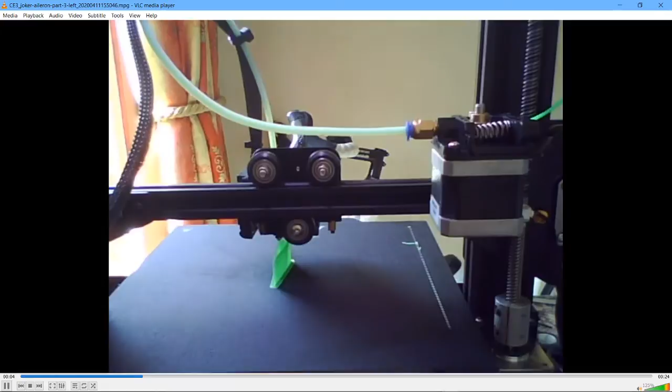Right, so yep, that came out good. Let's have a look at it. And then we're going to print out two bits together in the next run, and I'm going to show you per model settings. Again, this came out pretty good. Skin was good.

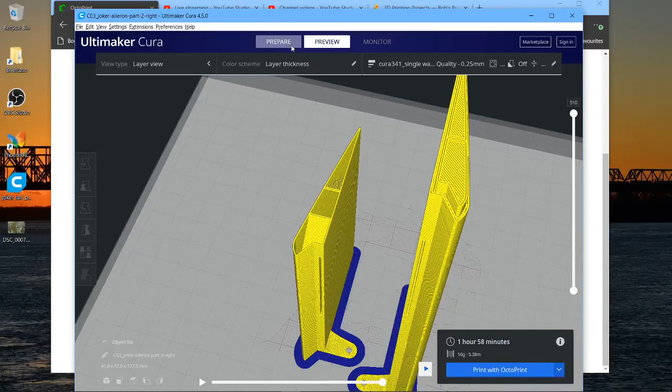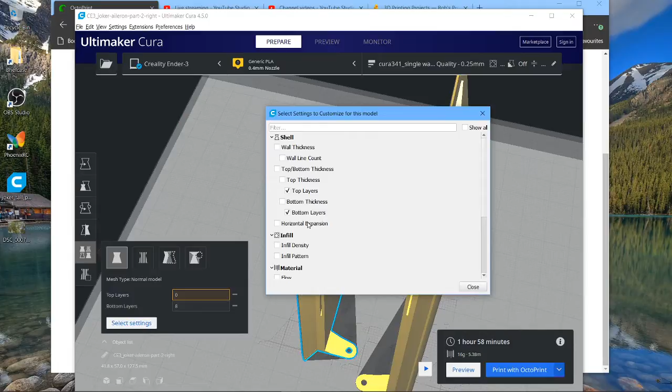Alright, so cross to Cura. So there's a feature I kind of touched on, but I didn't actually go into, where you can actually select the per model settings. And what you can do is per model that you select settings, choose what you want, bottom, top layers, and say close. So for the top layers, I've got 0 on this one. The bottom layers, I've got 8. And on this one, I've got top layers of 2 and bottom layers of 8.

So both of these have different settings, which is something Simplify 3D does. I believe what Simplify 3D does in addition to this is allow you to select different thickness at different layers. So you could say I want this bit beefing up, but I've not really needed that. But it could be useful if you had a lot of different models and you might want to choose something within the layer.

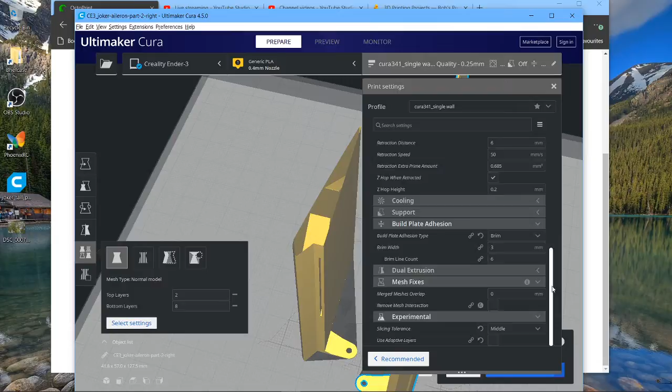And later on, I mentioned we'll have a look at adaptive layers, which is this setting down the bottom, which can be quite useful. And I have found on one of the wing sections of the Joker that you definitely need that. You need a combination of that and top layers.

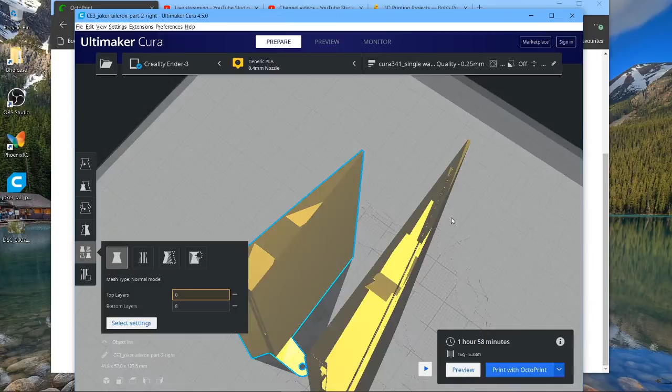So, well, I do actually want a top layer on this one, as it turns out, or I think I do. Let me just double check actually. Yeah, I think we might. No, we don't, because it is going to receive a dovetail, that one. Yeah, I'm just double checking that doesn't need a top layer. Hard to tell if that one does. In fact, obviously this does. We preview it. We can see we got a top layer, so this can act to the dovetail.

Actually, this, let me think. Does that need a top layer? Yes, it does. Why does it need a top layer? Because this bit will go against the edge. So it is an edge piece. So I am going to give that 2 top layers. Reslice it. Wait for that to kick in. That seems to need more thinking time.

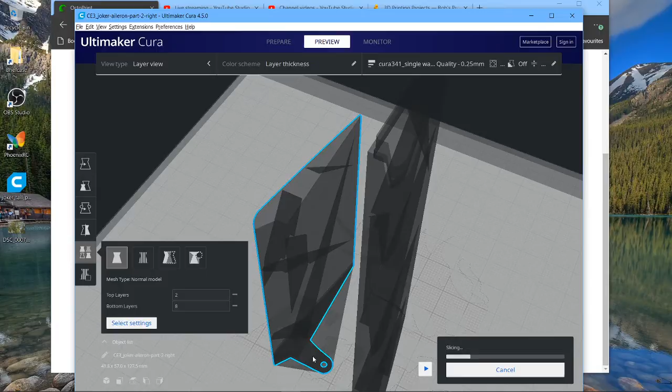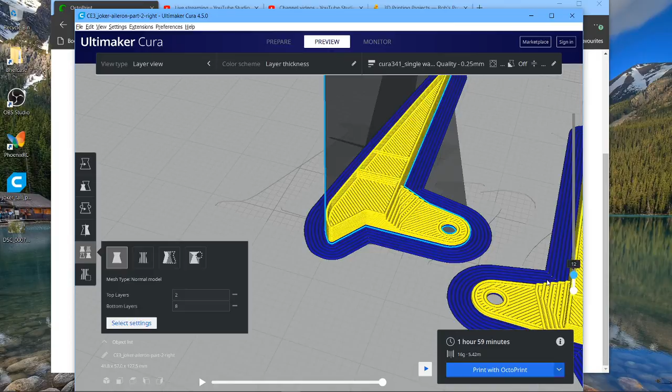And the other thing is top layers do affect this control horn as well. So we better zoom in on that and make sure that it's got enough top layers. So we'll turn this around a bit, zoom in a bit, preview, scroll right down, make sure this has got enough. Yeah, it's fine. Just rotate that around. Just 3 layers thick, including the brim. So I think we're good to go on that one. Zoom back out again. And all the way to the top layer.

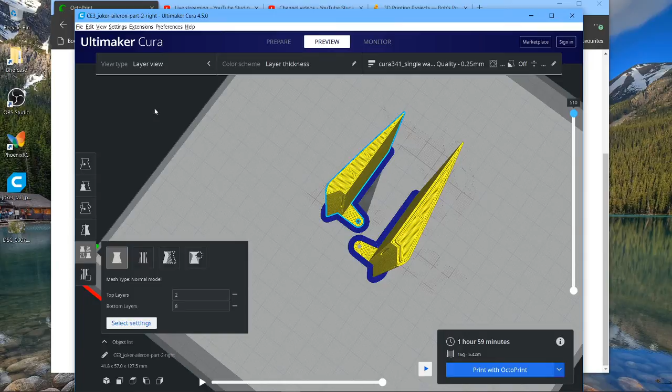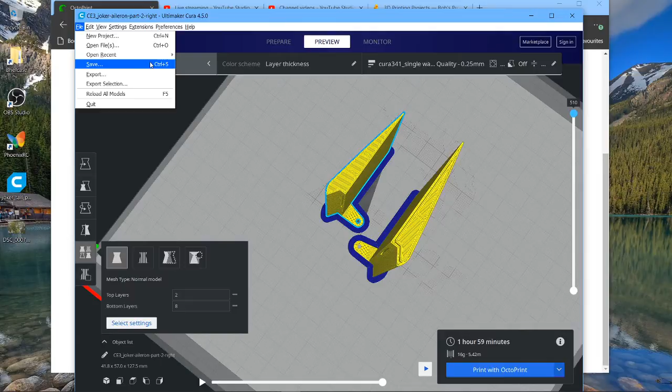In fact, let's bring in the third part. So these are the right section. Yeah. So we want right section 3. Right 3. I've already printed it, but I'm going to bring it in anyway. Right 3. There you go. Let's arrange all on build plate. That's a bit better.

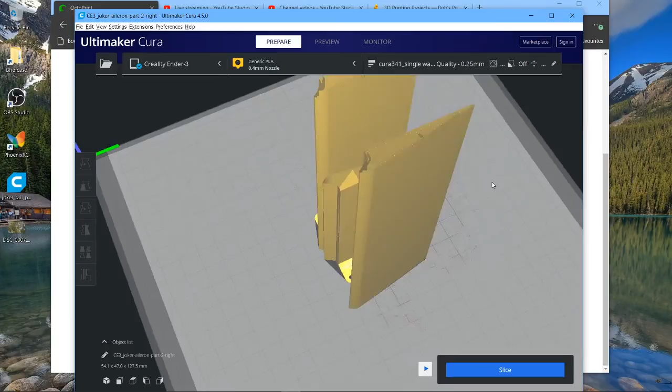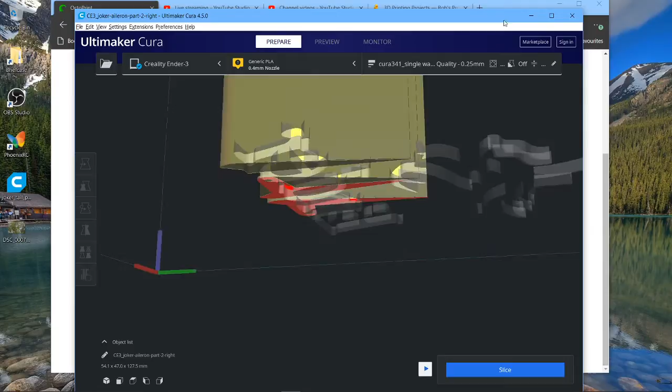Let's come back to prepare and let's have a look. Yeah, this one for sure would not need a top layer because it's where it dovetails, I think. Yeah, but it would need a bottom layer if I were to use it.

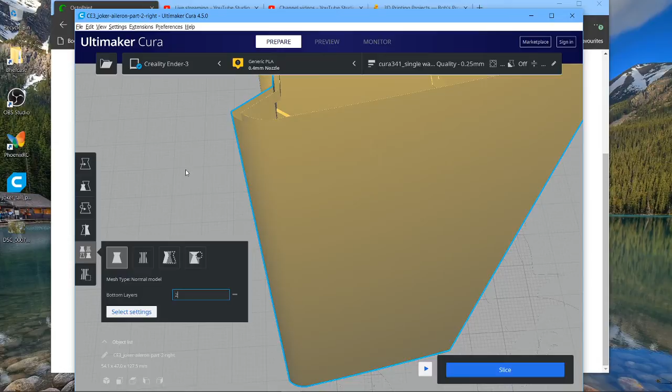So again, you just select it, choose select settings, choose I want a bottom layer, but I don't want a top layer. Oops, sorry, close. And then choose which the bottom layer is going to be. In this case, it would be 2. Doesn't require a top layer because it's going to dovetail into this piece here. So if I wanted all those 3 to print out with different or individual layer settings, then use that option there. We'll just see how that comes out.

So it's got to use a bit more brain power because it's doing 3 objects with different layer settings for the top and bottom layers. Here we go. And that should hopefully work. Let's have a look if it does.

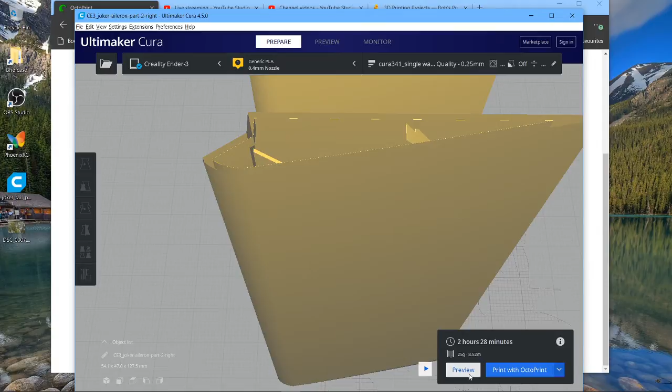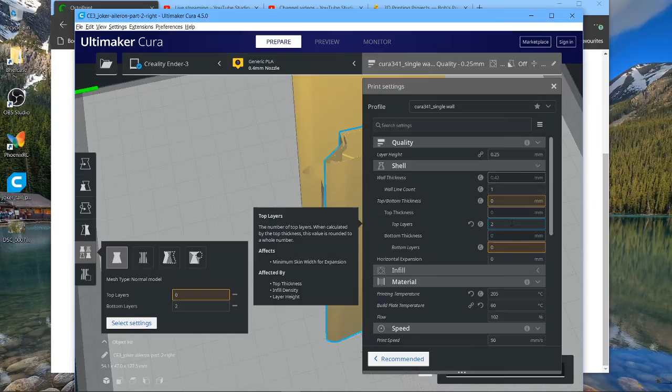Let's go back to prepare. Select this piece. Select settings. Select top layers as well, but make sure I've got 0. It's pulling that from another part of the model then. That's interesting. It's worth doing that just to see the exercise in itself, what it was doing. Maybe it's getting that from here. Yeah, it is. Top layers look 2. Now if I set that to 0, first of all, let's just see what this is going to do. Make sure it respects it.

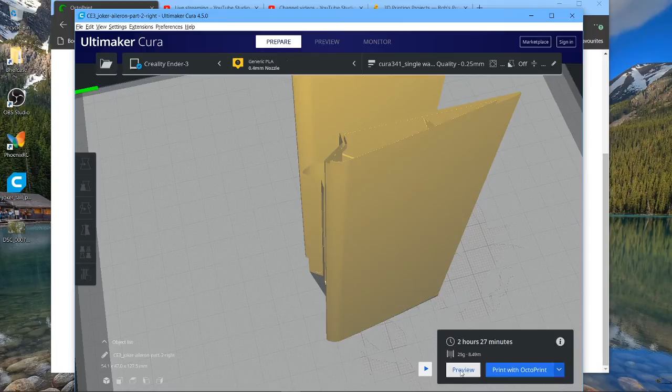Right, preview. Yeah, that's better. So no top layer on that piece. Top layers on the other 2 pieces. Turn off top layers in the default profile. I don't know if it needs reslicing. Just wondering how that affects it. I presume it does have an impact. That's why it was applying 2 top layers to this, because it wasn't using the per model setting.

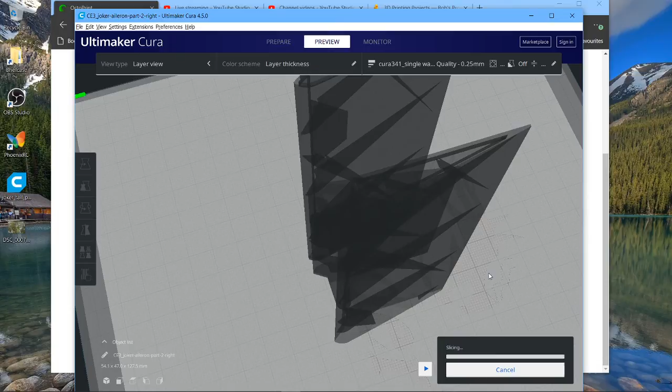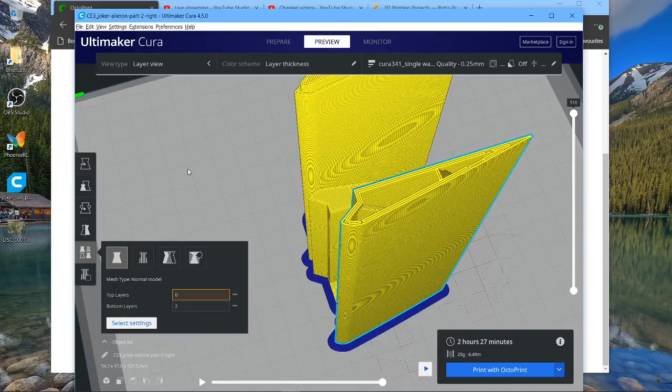Okay, yep, so it has worked then. It's as I assumed. It has respected the per model settings. So on this one, 2 tops, 8 bottom. This one, 2 tops, 8 bottom. This one, 2 bottom, 0 on the top. Yeah, okay. Anyway, as I say, I am not going to print that part out because it's already been printed. And as this is the last print run of the day, I'm just going to print these 2 together and that'll wrap up the ailerons.